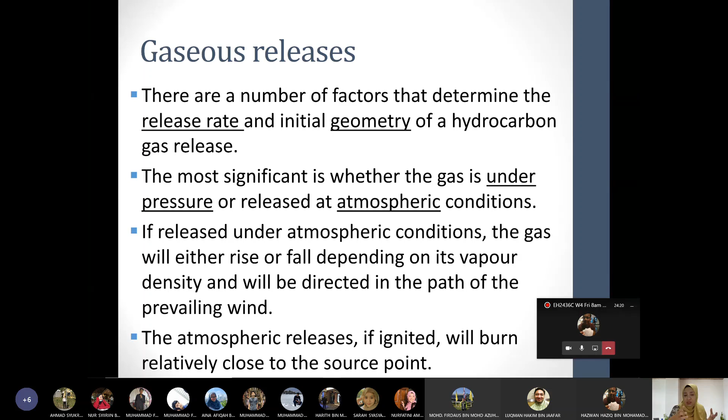But in the case of pressurized gas, it will release a gas jet. So you have a stream of gas jet, and depending on the nature of the failure, it can be directed in any direction: upwards, downwards, sideways. And in this case, the release of this hydrocarbon gas or vapor will generally produce a vapor cloud, like in the previous picture. If that cloud is not ignited, then fine, it will eventually just disperse away in the atmosphere. But once there's an ignition point, it will explode.

Okay. So initially, most of the time, the escaping gas is so rich it is above the UFL, its upper flammable limit. So it's not flammable because it's so rich. But as wind starts to disperse it further, it drops below the upper flammability limit and goes into that flammability zone. So that is when it becomes flammable.

Because you have all this wind, the turbulence mixes the air with the gas, making it a flammable mixture. And if it has not met any ignition point, it will eventually just disperse and go below the LFL. If you're lucky, it will just go below LFL and no explosion will occur.

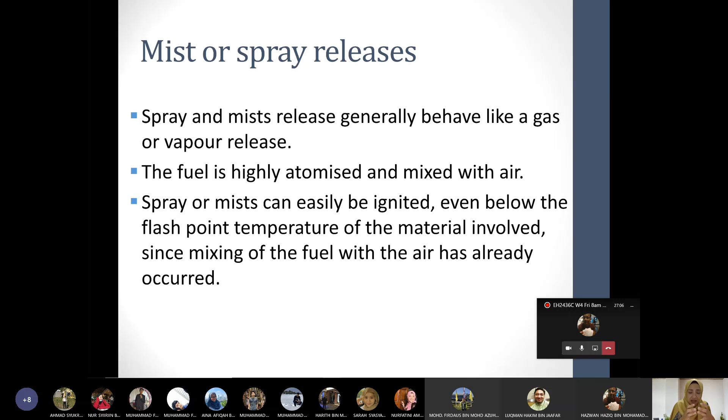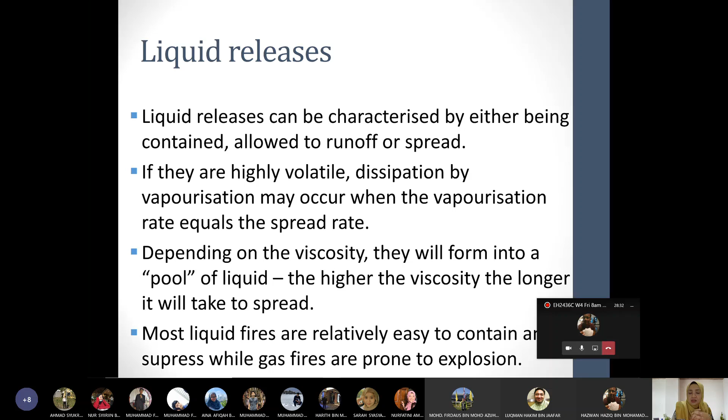So depending on the viscosity of that liquid, it will form this pool of liquid. The higher the viscosity of that liquid, the longer it will take to spread around, so it's easier to control. Most liquid fires are relatively easy to contain and suppress, while gas fires are prone to explosion. For example, an oil spill in the ocean is easier to manage than a gas leak.

And next, unfortunately and surprisingly, is smoking. So we can see here that people do smoke around their workplace. Third is mechanical, which is friction. For example, you have bearings or broken parts causing high friction that produces sparks. A good high percentage is also overheated materials or abnormally high temperatures. Sometimes you have vessels or furnaces with a high temperature, and that can cause explosion. So these are overheated materials, hot surfaces.

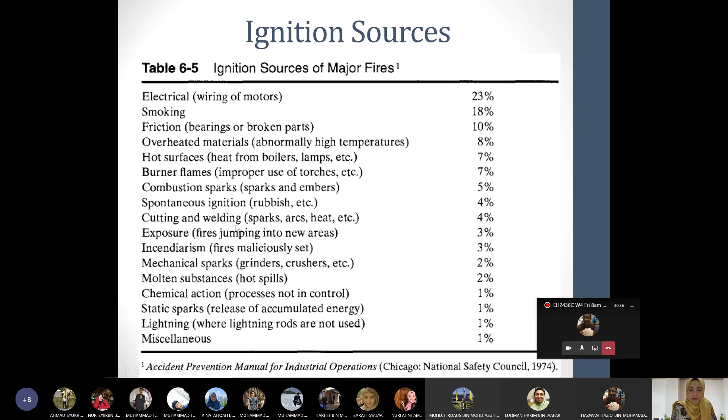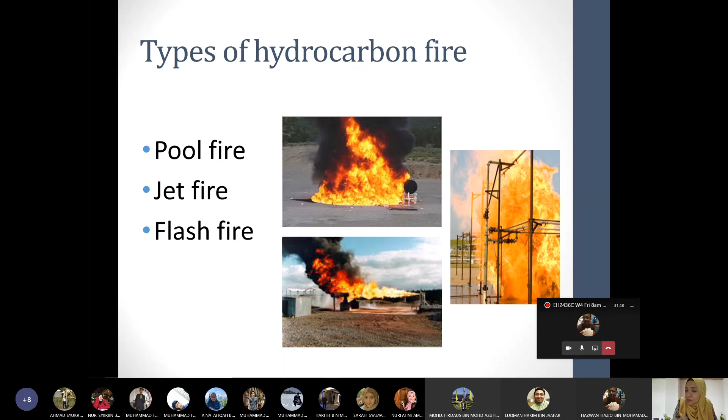And then finally, the flash fire. A flash fire is a massive amount of fire that happens in just less than 3 seconds, I think, or less than 1 second. No, can't be. But very quick. Flash fires are massive but very quick. Now let's look at the different types of fires one by one.

So first of all, jet fire. A jet fire is when you have significant momentum from a source under pressure. For example, you have a vessel with a flammable liquid or gas, and it's suddenly released from a pressurized vessel, tank or pipe, due to a puncture or faulty connections. If it is ignited, it will immediately have that kind of jet-like fire.

The pressure release generates a long flame. Like you saw in the previous picture, the flame is long, and it's a stable kind of flame under most conditions. It doesn't really spread around. It's just a long flame.

And the duration of the jet fire is determined by the release rate and the capacity of the source. So how long that fire will sustain depends on how much release there is. If there's still hydrocarbon, it will keep on burning. Once the hydrocarbon is finished, it stops burning. It also depends on the flow rate and pressure. The flame length increases directly with flow rate.

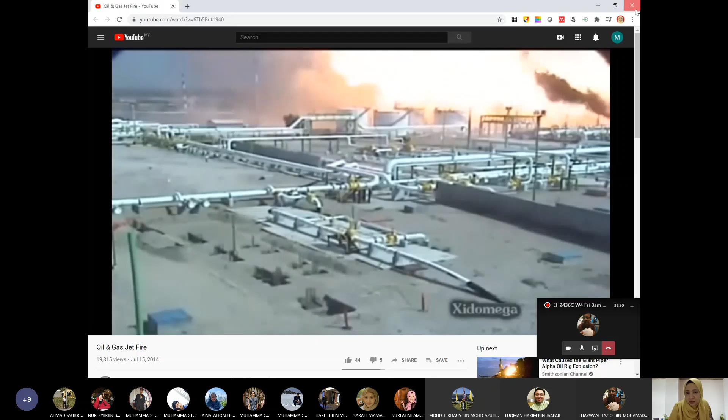This one is already, there's already a fire, so people are already running, so they know it's coming. Okay. Oh, come on, run! This one's running, and he is. So this guy can still walk around because I guess they know how to control it, or okay. So that is the video. Oh gosh. All right.

Next type of fire is called a pool fire. It is the combustion of a flammable vapor that evaporates from a layer of liquid at the base of the fire. So this is when you have a liquid hydrocarbon release, and that liquid hydrocarbon is volatile and causes a vapor to vaporize on top of the liquid and produces a flammable vapor. If it's ignited, then you have a fire on top of that pool of liquid. So that's a pool fire.

So it occurs on ignition of an accumulation of liquid as a pool on the ground or on water or other liquid. So it can be on the surface of water, it can be on the ground. And normally, if you have storage tank fires, it's normally treated as a pool fire because it's contained inside a tank. A steadily burning fire is rapidly achieved as the vapor to sustain the fire is provided by the evaporation of the liquid by heat from flames upon release.

A steadily burning fire is rapidly achieved. So you can achieve a steady burning fire as the vapor to sustain the fire is provided by the evaporation of the liquid by heat from the flame. So when you have the liquid, right, and you have an ignition source and there's a fire on top of that pool of liquid, that fire can sustain long because of the heat, the fire is hot.

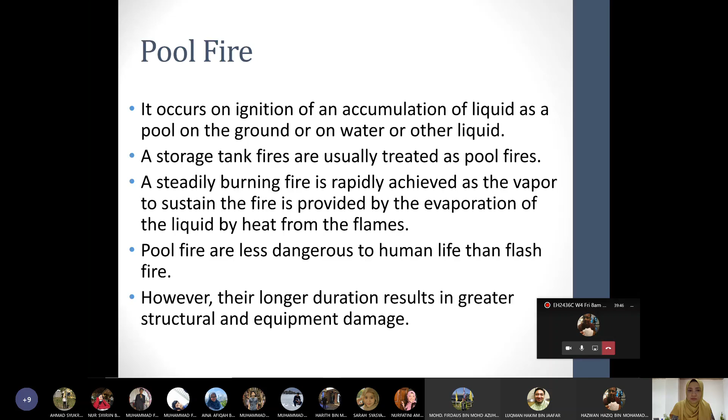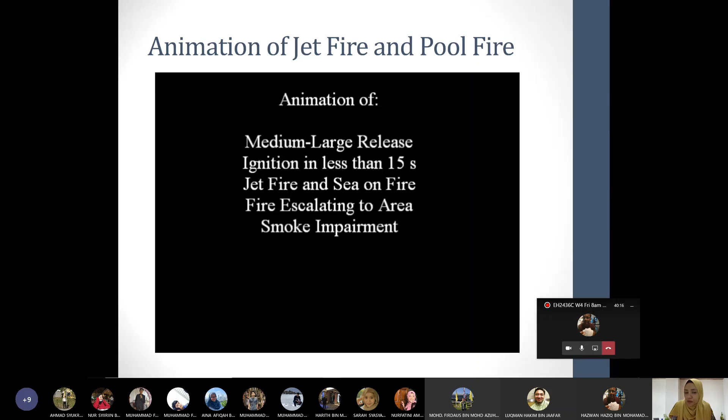Okay. Let's see here. I have an animation of a jet fire and a pool fire. This is just an animation. It's a medium-large release and ignition in less than 15 seconds. The jet fire and the sea on fire escalating to area in the smoke impairment. This is on a platform. Simulation of a jet fire and pool fire on a platform.

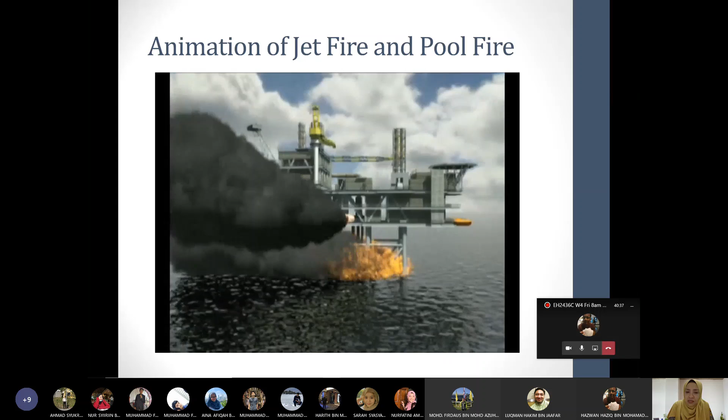So there you have a jet fire that jets out from probably somewhere like a punctured hole from a pressurized vessel, and down below is a pool fire, probably because there is oil spill. So it's liquid hydrocarbon oil spill on the surface of the water, and then it's being ignited, and you have the pool fire at the bottom of the platform.

Now, flash fire is the one that happens really quick. This is a combustion event with little or no overpressure at all. So this happens in atmospheric condition, and it happens very fast, just like its name, flash. And it's because if you have a release of hydrocarbon gas, for example, it will just immediately burn and consume the whole gas in a split

second. As fuel gas is released into air, typically its concentration is very high near the release point, and it's not well mixed with the air, so the gas ignites at that time. Generally, it results in a flash fire because it happens quickly. The fuel gas has no time to spread out or disperse to greater space. And flash fire consumes escaping fuel, so it is not available for further mixing in air. So it immediately uses up all of the released gas. So therefore, it doesn't have time to be dispersed in the air.

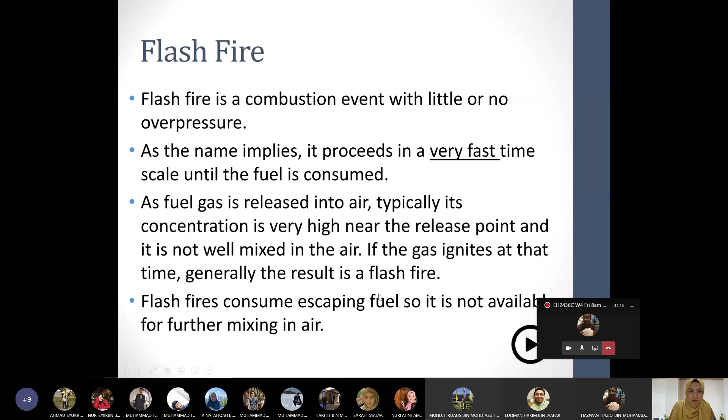Okay, effects of fire on people. So we've seen all of the different types of fires.

I think they put it in the basket.

What's this? Okay, so fire. What is the effect on people? There are so many different types of fires, and do they cause death, or do you just get burned from that fire? So all these things are predictable. You can actually calculate what is the probability or the percentage of the type of injury that you can get from the different types of fire.

Because fire, as you know, has different intensity or different strength and even length of time. Some is fast, some takes quite a longer time, some is small, and some fires are big. So all these different fires will have different effects on us, on people. Okay. So the main hazard that presents from a large fire is actually due to the heat radiation. It's not really that fire.

That's why, you know, if you touch fire, right? Have you touched fire before? You don't really get burned, right? Kan? Have you touched fire before? No, yes. Right. Okay. So if you touch fire, you don't really get burned. But it's the heat from the fire that burns you. If you have like a fireplace, if you go really close to it, your skin can get burned from the heat of that fire. It's not really from that fire.

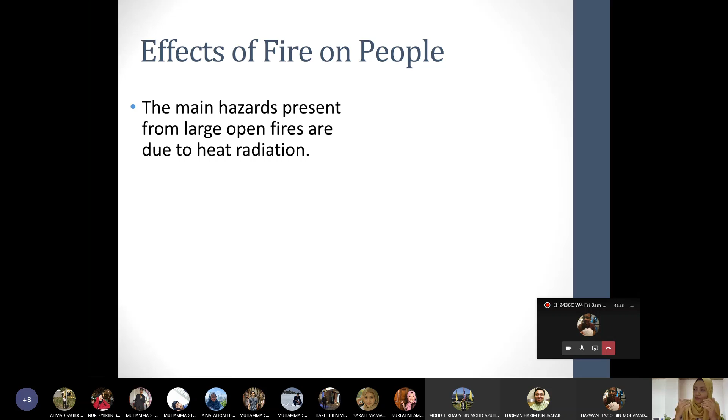Oh, I think it's starting to burn my finger. Okay. So the length of time is also a factor of the extent of injury that you will get. Okay. All right. So a first degree burn.

What is a first degree burn? So have you ever maybe accidentally touched something hot, like a pot, and then your finger becomes red, or your hand becomes red because maybe you know, telangga your motorbike, right? There are parts of the motorbike that's hot, and then your legs suddenly become red. So that's a first degree burn.

So first degree burn only affects the epidermis, which is the topmost surface of your skin, and it causes a mild level reddening of your skin, but it's reversible, erythema, and then you don't have any blisters. Because only the epidermis layer is affected, and it probably happened really quick, so you don't have blisters forming. And it normally goes back to normal around 24 hours.

Now, have you ever touched something hot and then after that you have blisters forming? Anyone ever experienced that? You have blisters after you have touched something hot. Do you know what blisters are? You know what blisters are? What are blisters? You don't know what blisters is? You know that kembung-kembung and then you have the liquid inside?

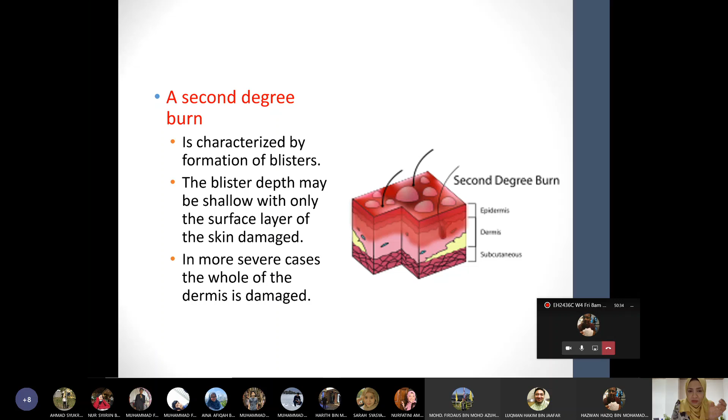Now, what about if you've seen burn victims who are totally black? If you got burned and the whole skin is black, that is a third-degree burn. It means that the burn has gone down to the subcutaneous layer of the skin. So the epidermis is totally burned, is black, and the dermis is also damaged, as well as the subcutaneous layer.

And then, so how do you get to these different types of degrees of burns? What is it? I don't know, over there. Just use the probe. Okay.

So again, it's the length of time that the person is exposed to the thermal radiation, and that length of time depends on the person itself. Depends on how fast you are to react to the fire. The longer the duration, even at low thermal radiation, can produce serious physiological effects.

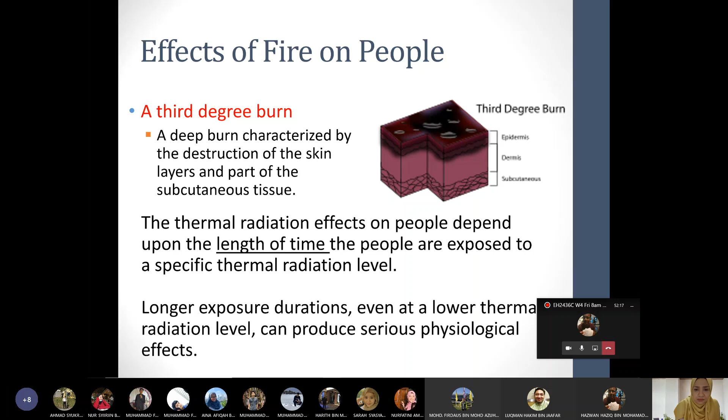And what is the factor that determines the duration that you are exposed to fire? One of them is the person's ability to run, for example, or the person's age or strength, or if the person is disabled, the person is not able to run. So those are factors that extend the length of time that the person is exposed to fire.

All right, so this diagram shows the difference between the first-degree burn, second-degree burn, and third-degree burn. So first-degree burn or superficial burn is only when you have this reddening, or the erythema. It normally goes back to normal in 24 hours. It only affects the epidermis layer of the skin.

But for partial thickness burn, or the second-degree burn, it can go down to the dermis area. Depending on the severity, it can go further down. This normally causes the formation of blisters, and you have those circular liquid-filled blisters.

A full thickness burn or 3rd-degree burn will cause you to have that blackened skin, and it affects even down to the subcutaneous layer, and sometimes even affects the muscle of the person's body. Most of the time, once these are all burned or injured, then you start to have infection. So that infection is the consequence of this burn if it's not treated correctly, and then that infection can cause the muscle to get affected.

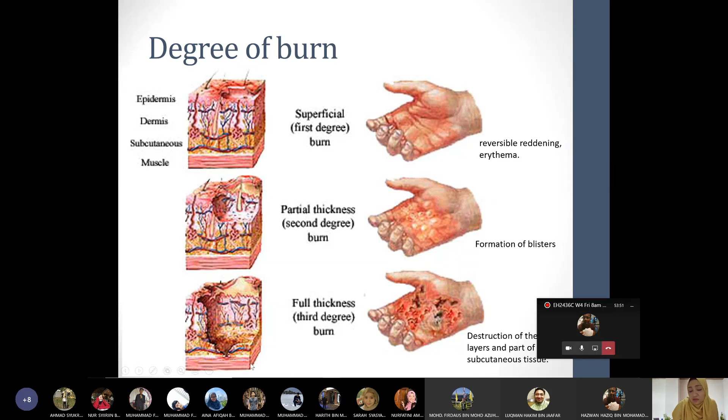So now, you can also die from fire. For 3rd-degree burn, there's actually a high chance, depending on which part of the body is being burned, that it can cause fatality. So burn or death is a direct consequence of the intensity of the radiated heat flux from the fire and the exposure time. So these are two major factors. One is how intense the fire is. Second is how long you're exposed to it.

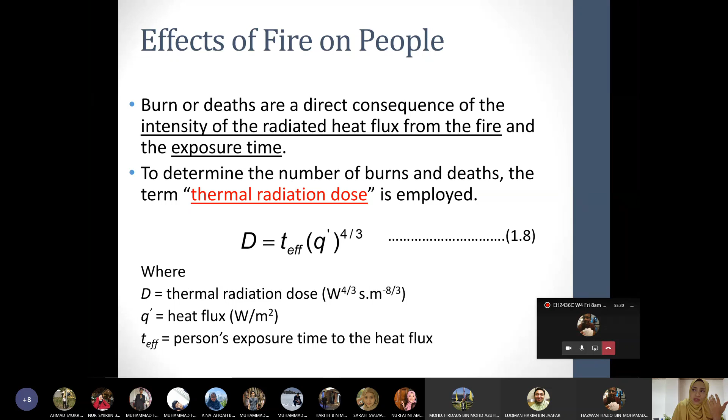Okay, so the exposure time, that T, depends on human factors most of the time, and also the type of fire. For example, flash fire only occurs in a few seconds, so the time there is short. But a pool fire can sustain long. And if that person just stands there and doesn't run away, then the time of exposure to the fire is longer. Maybe somehow he's disabled, not able to run. I'm not sure.

Another factor that affects the exposure time is the position of that person in relation to the fire. Was he lying down or sitting down when the fire occurred, as compared to standing up, so he's more ready to run away? And whether he's near to it or far away from it. Also the time it takes to react and how he reacts when he realizes the event. Does he run fast, or is he a slow runner? Can he sprint? And the person's age too: an elderly person might not be able to run as fast. Or physical condition: is that person not fit to run, or disabled and needs a wheelchair? Those things affect the time that person can run away from the fire.

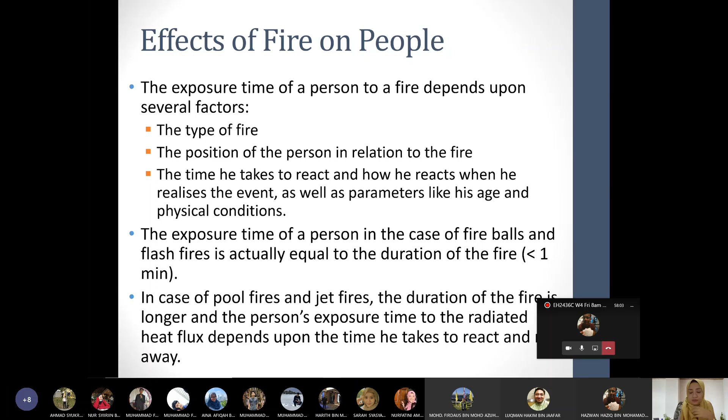So that exposure time T is usually taken as equal to the sum of the initial reaction time plus the time required to reach the safe point. Let's say this is where the fire is and you're standing here. The time starts from time 0 when the fire starts until this person runs away and reaches a safe place. That's the total time, which is the exposure time.

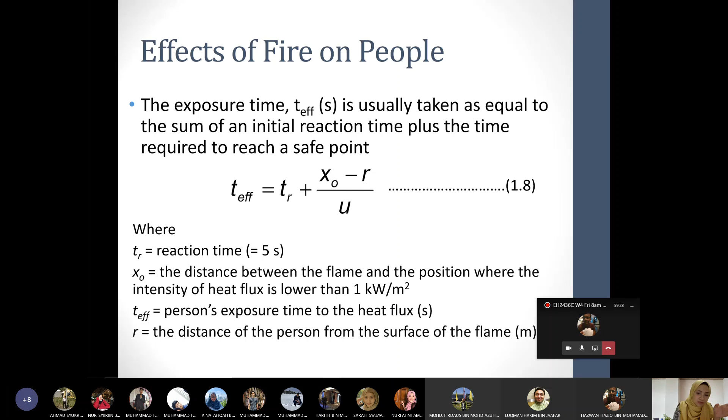So the exposure time is TR plus (X0 minus R) divided by U, where TR is the reaction time, normally taken as 5 seconds for you to think and react. X0 is the distance between the flame and the position where the intensity of the heat flux is lower than 1 kilowatt per meter square, which is the safe heat flux radiation a person can receive. T effective is the exposure of the person to that heat flux. And R is the distance of the person from the surface of the flame, in meters.

And U is the velocity, the escape velocity, normally 4 meters per second, that a person will sprint to escape the fire. But that's really okay. That's quite okay. All right.

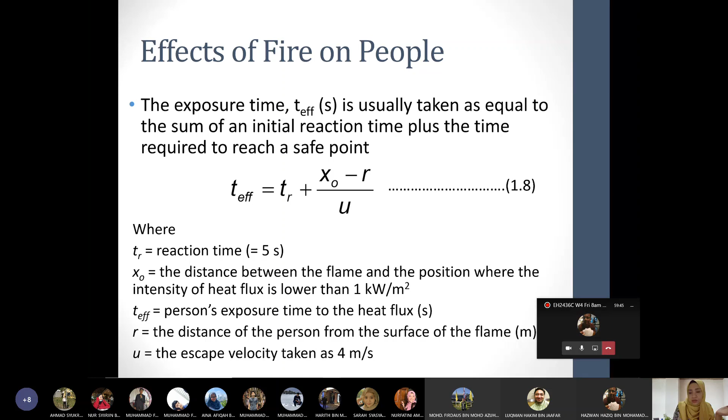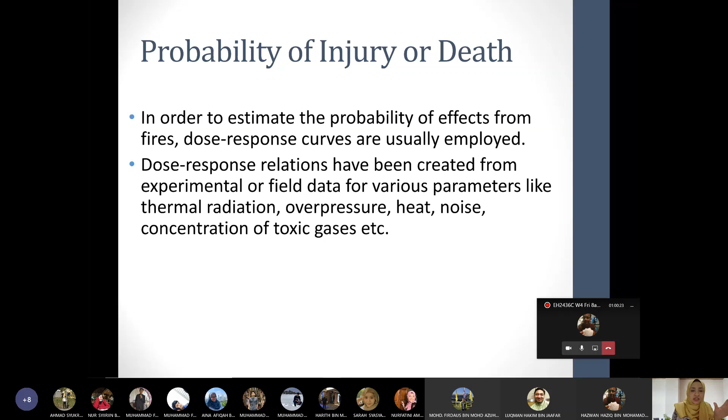Now, so how do we predict the probability of a certain type of fire to injure somebody or to cause death? So this can be done using a simple calculation. To estimate the probability of the effects from fires, we normally use a dose-response curve. Dose-response relations have been created from experiments, from field data, and for a lot of different parameters such as thermal radiation, overpressure, heat, noise, concentration of toxic gases, etc.

And right now, the most widely used method is called the Probit function. These Probit functions can be used for many different types of accidents to predict the probability of death or injury. But in our case now, we will use these Probit equations for the effects of fire. So we look at fire first. So the Probit equation is Y equals K1 plus K2 ln V.

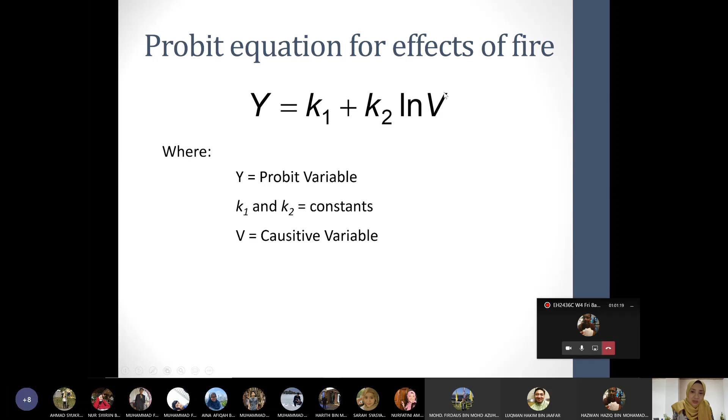So this Y is the Probit variable, and that will tell you what is the intensity or the effect of that fire. K1 and K2 are constants that you can look up in Probit tables. And ln V is the causative variable. In our case, because we're looking at fire, V is actually the thermal radiation dose, the D that we saw just now, which is the effective time times the heat flux.

Okay, so the dosage of radiation that you get, which is the time times the heat flux. So that's our D, which is the V. Now K1 and K2 are calculated values or already published values that you can use. For example, if you want to know the percentage of first degree burn, you use this K1 and K2 value. If you want to calculate second degree burn, you use this K1 and K2. If you want to know how many people would die, you use that K1 and K2.

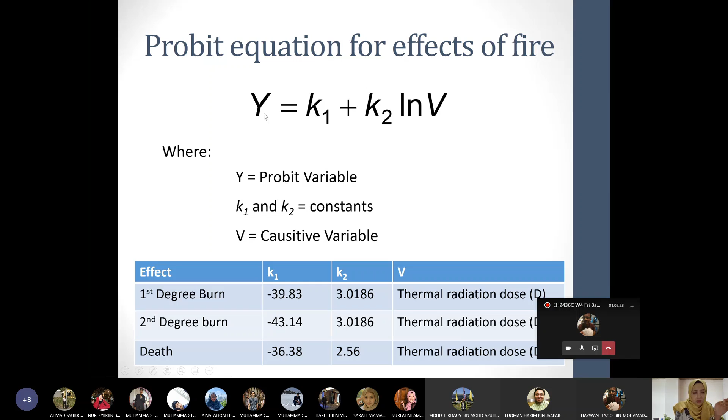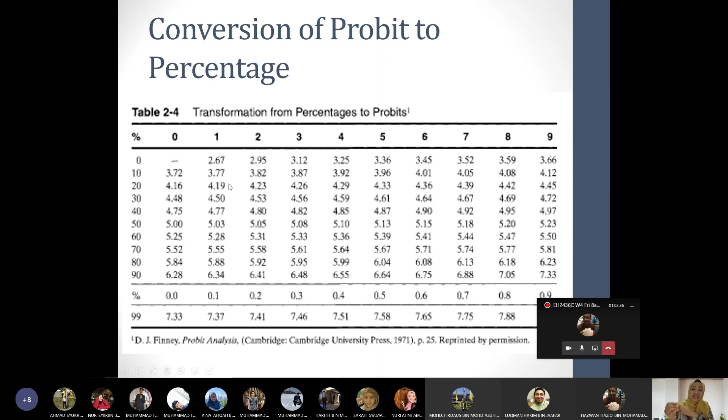Okay, so once you put in the K1 value, the K2 value, and you know the thermal radiation dose, you can get Y. And that Y is a value between 1 to 10. And then from that, you can use this table to find out what that value is in percentage. So let's try one example. You can take out your calculators, pencils, pens and papers.

Okay, so let's find out the percentage of people that will suffer first degree burn, second degree burn, and death if exposed to a thermal radiation dose of 9 million watt second per meter squared. So this is your D. So we want to calculate these three. How many people would die? How many would get severe burn? How many would get just a superficial first degree burn?

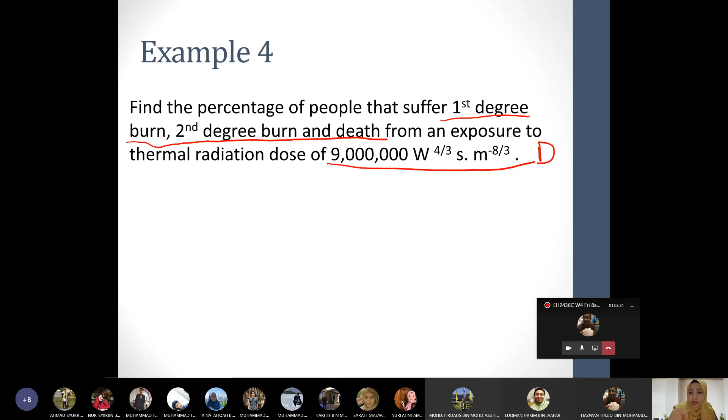So we use the Probit equation, Y equals K1 plus K2 ln V. A good way to do this, let's put it in a table. No, not in a table. We go back to that table just now, the values for K1 and K2, and the thermal radiation dose for our calculation is 9 million, right?

Okay. For first degree burn, the equation becomes Y equals negative 39.83 plus 3.0186 ln D, ln 9 million, and then you calculate. For second degree burn, Y equals negative 43.14 plus 3.0186 ln D. And for death, the Probit equation is minus 36.38 plus 2.56 ln D.

So try and calculate the value of Y for all these three cases, because we want to know how many will die, how many will get second degree burn or first degree burn. Anyone? Calculators? Still calculating. Okay.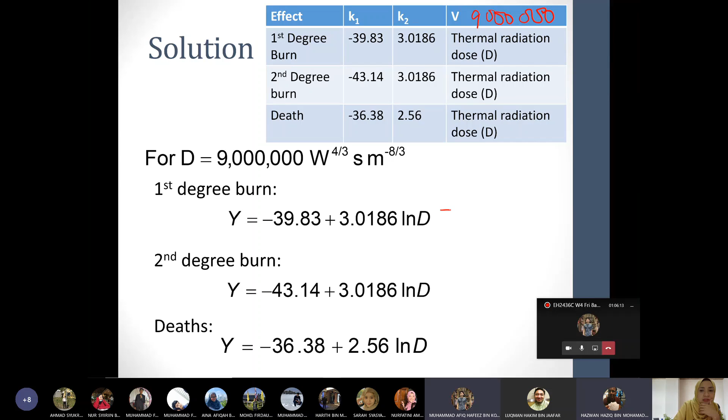Then, so first degree burn, what is the Y? 8.51. So first degree burn, 8.51. Okay. Second degree burn, 5.196. Not sure if it's right? 5.196, 5.2. Yes. Right. And death, 4.6. Yeah. All right.

Okay, so we have all these values. So let's look at what it means. Basically, you can see that first degree burn is a high value, second degree burn is a lower value, and death is a low value. So it already indicates that there's a high chance you get first degree burn, a medium chance that you get a second degree burn, and quite some percentage of people will die from this burn.

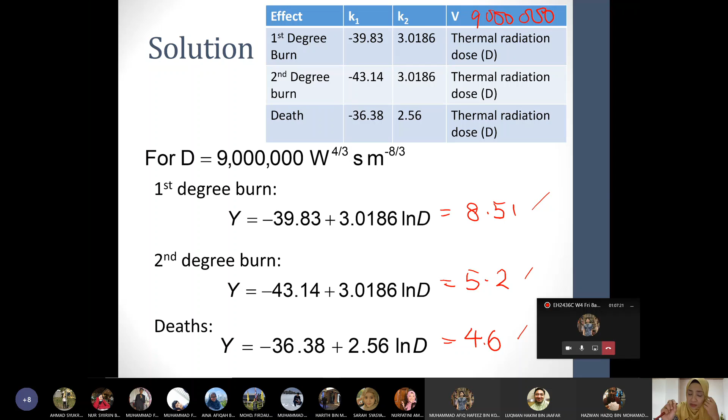But to get a more accurate percentage, we go to this table, where we transform the Y value from Probit. These are Probit values, so we transform Probit value into percentage. Put this away. First of all, Y equals 8.51. If you look inside here, do we have 8.51? You can see the numbers are 2, 3, 4, 5, 6, 7, so the numbers increase, right?

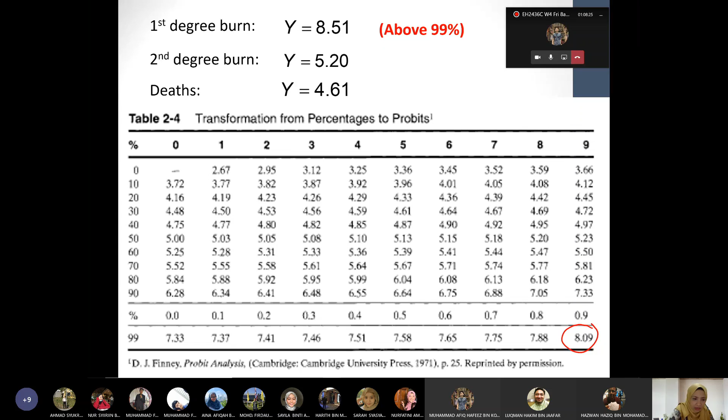Where's 8.51? There isn't. The highest number is 8.09. So let's just take 8.09. If you read 8.09, it says 99%. That means more than 99% of people will get first degree burn. And then for 5.2, do we have 5.2? Yes. Where? Here. Okay, so that's 5.2. If you read here and go up, it says 50%, so this is 50%, 58%.

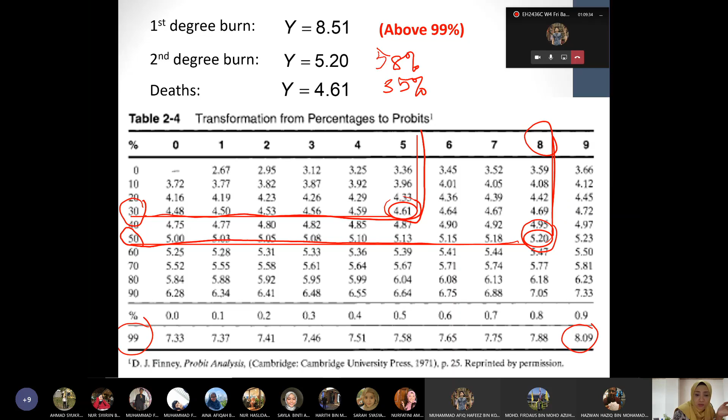Second degree burn is 58%, and death is 4.61, which is here. 4.61 is 35. So actually for 8.51 it's above 99.9, so close to 100%. Almost everybody will get first degree burn if exposed to 9 million watt meter second of thermal radiation dose.

And then there's a 58% chance that people will get second degree burn. That is more than 50%, so more than half of them will get second degree burn. They will start to have blisters. And death is about 35%, so about 35% of the people will die, or there's a chance of fatal cases for 9 million watt meter second of thermal radiation dose.

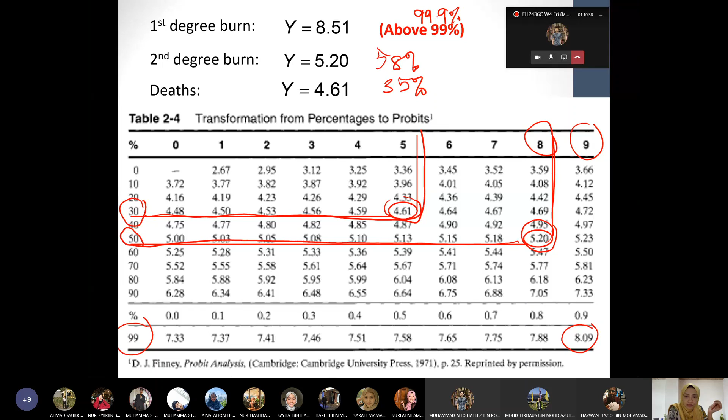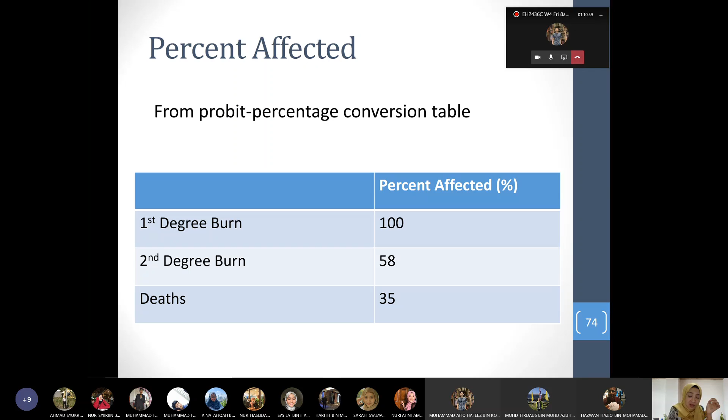Okay. All right. So that is our results. You can say that for first degree burn, 100% of people will be affected, second degree burn is 58%, and death is 35%. So that is how you use the Probit equation for the effect of fire on people. Any questions?

So we have the slide. Let's look back at what we have covered. We covered the fire triangle. The fire triangle tells you that to start a fire, you need 3 elements: a fuel, an ignition source, and an oxidizing agent. Then we looked at fire, explosions, flammability, the flash point, fire point, ignition point, and UFL, LFL, all these terms.

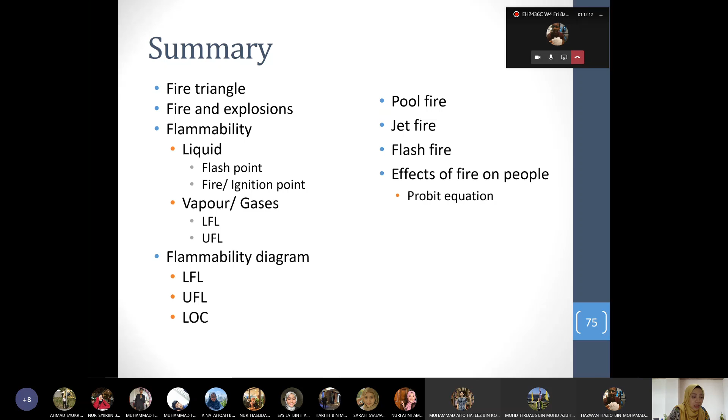Then we looked at the flammability diagram. We drew the air line, the stoichiometric line, and so on, and we calculated LOC. And today you were introduced to pool fire, jet fire, flash fire, and we did some calculations using the Probit equation to calculate the probability of the effects of fire on people. So that is the end of our slide.

And we will continue with the next topic, which is explosion. We have covered fire, so now we go to explosions. Would you like to take a break for a while? Sure. Or we can continue?